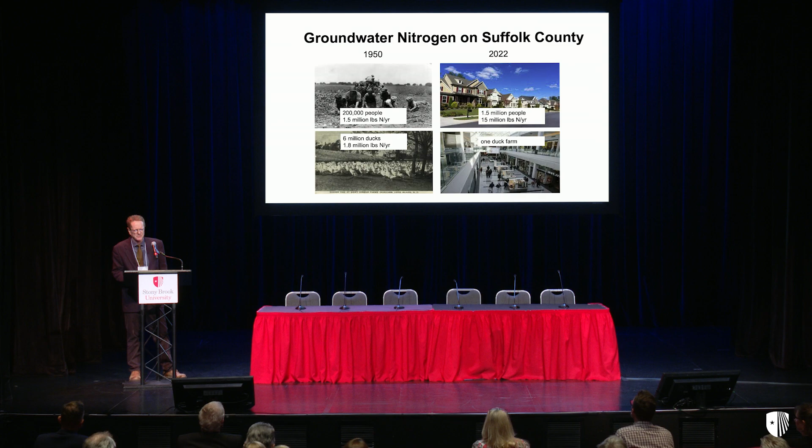This morning, I'd like to give you an update on our non-proprietary technologies for removal of nitrogen from on-site residential wastewater. You'll see some overlap, and so I will be brief in some of my opening comments, but things have changed a lot in the last 75 years on Long Island. The human population has increased by 7 times. The duck population has virtually collapsed, but we've transitioned from an agricultural economy to a more suburban economy.

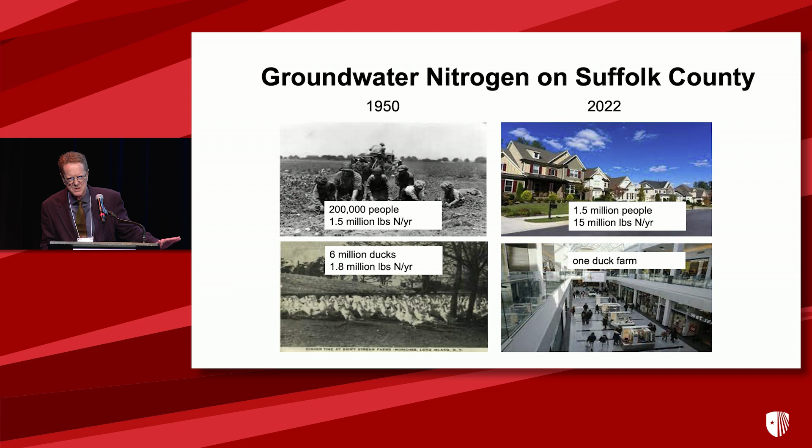Humans, ducks, or human waste, duck waste, and fertilizers from agriculture all create excess nitrogen in their environments, but the net on Long Island in the last 75 years has been an increase of nitrogen loading to our groundwater, which, as Chris describes, cycles through our aquifers 5 times.

Unlike in Nassau, where most of the communities were planned and most were sewered, in Suffolk County, we grew without sewers, first with cesspools, and later from the 70s with septic tanks and leaching rings. So there's roughly 360,000 residences in Suffolk County that have these technologies that don't remove nutrients, either phosphorus or nitrogen.

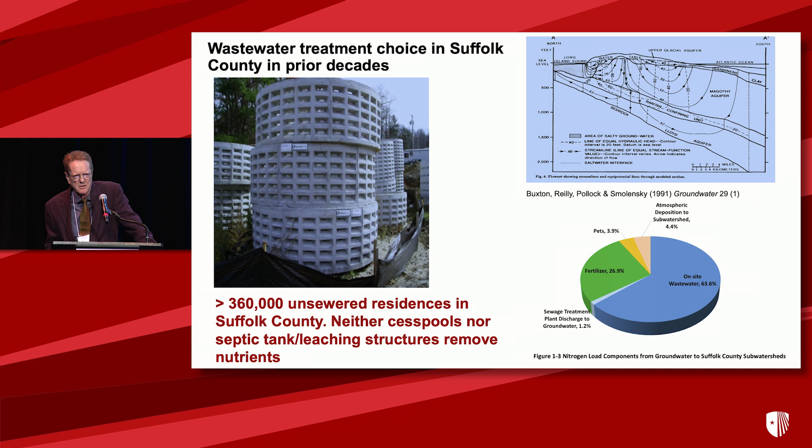And Chris explained the water cycling already, from the drinking water estuaries to our marine environment. About 2/3 of the nitrogen entering those environments is from septic residential wastewater. That not only affects our estuaries, but also our drinking water wells, and our wells, before they're mixed, have some of the highest

More recently, there's been a lot of epidemiological work which indicates correlations between lifetime exposures to nitrate and various cancers. And these epidemiological studies have been done by the Iowa Women's Health Study, and also in Europe, where they keep track of this kind of information. And those correlations exist at 3 milligrams per liter.

But I want to emphasize that this is lifetime exposure. So I'm not suggesting that we shouldn't drink the water out in restaurants in Greenport, not like that. But we also shouldn't ignore it.

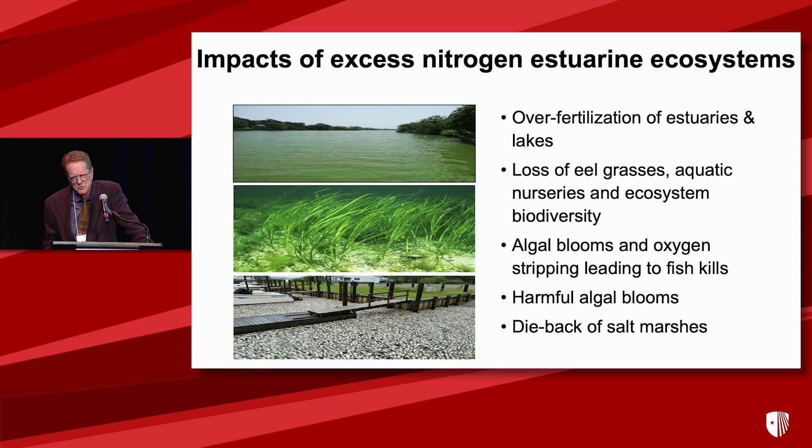We also, on Long Island, have excess fertilization creating taller plants in salt marshes, and then when they die and they fall over because they're larger than the natural salt marshes, you create dieback of those salt marshes, which we found out what the consequences of that was in Sandy.

The really positive news here is that Suffolk County has responded to this situation in a very responsible and comprehensive way with the subwatersheds wastewater plan, which Peter Scully, one of our guests here, was instrumental in pulling together. And the accompanying legislation, the Article 19 legislation, has now produced 7 systems which are available for commercial use, which lower very, very high nitrate levels in wastewater in Suffolk County down to below 19 milligrams per liter.

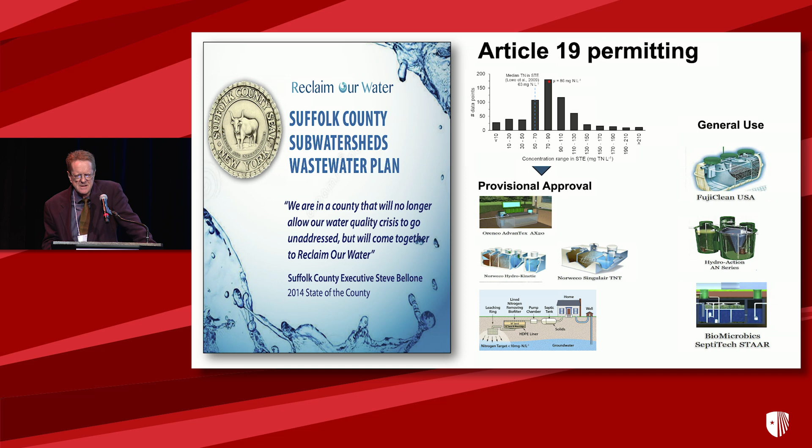The chart in the upper middle here shows that we have over 20 milligrams per liter higher nitrate than the national averages here. So these take wastewater from about mid-80s nitrate levels down to under 19, which is a major accomplishment that Suffolk County should be really proud of.

So now, having gone through the background, I'd like to just talk about some of the center's technologies. They all share and work on a common principle, which is biological nitrification, denitrification. And they do that through filtering wastewater through a sand bed, which nitrifies, and then through a sand and wood chip layer for denitrification. All of those systems operate with a septic tank, a pump chamber, but then the biofilter itself, we have different configurations which control the hydraulics.

So one of them, the most basic one, is an unlined NRB, nitrogen removing biofilter. And the effluent from that system goes directly to the environment, directly to groundwater. You don't need to invest money in leaching galleys or leaching rings with this system.

On the other hand, what we've found is that with the periodic intermittent flows of wastewater as it's dosed to the system, denitrification is less efficient, and there may be preferential flows that develop. That system, we now have a revision of with design modifications, which I'll talk about briefly momentarily.

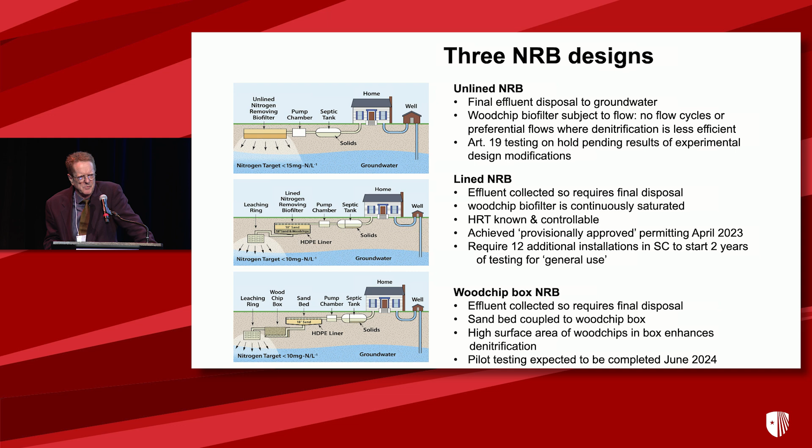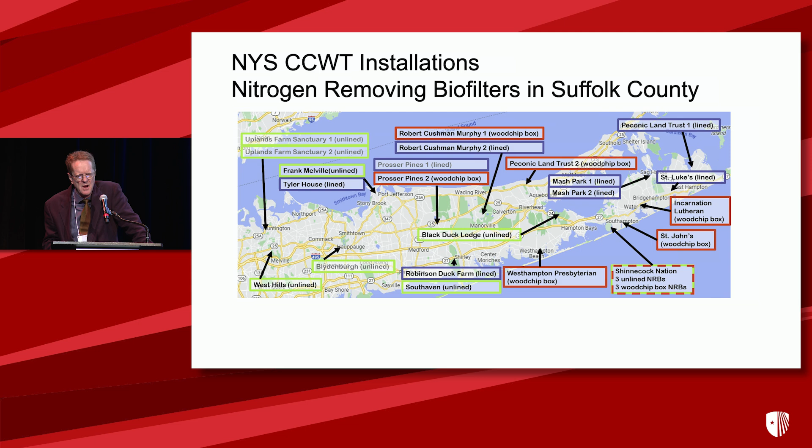It achieved provisional permitting last year, and we're in the process of organizing financing for another 12 installations so that we can start general use in the near term. Similar situation with our wood chip biofilter, and we're expecting to finish pilot testing for provisional use this month. And we have over 20 of these systems in Suffolk County now, with additional systems that we've installed in collaboration with Indian Health Services at the Shinnecock Nation.

The performance has been pretty good. Our lined nitrogen NRBs are getting about 13 milligrams on average in final effluent. That's about an 83% reduction. Our wood chip boxes, and these are numbers we've calculated recently going through April, are even lower, down to about 7 milligrams per liter, or over 90% removal. The unlined are up in the mid-20s with about a 2/3 removal, which is why we need to work on them a little more.

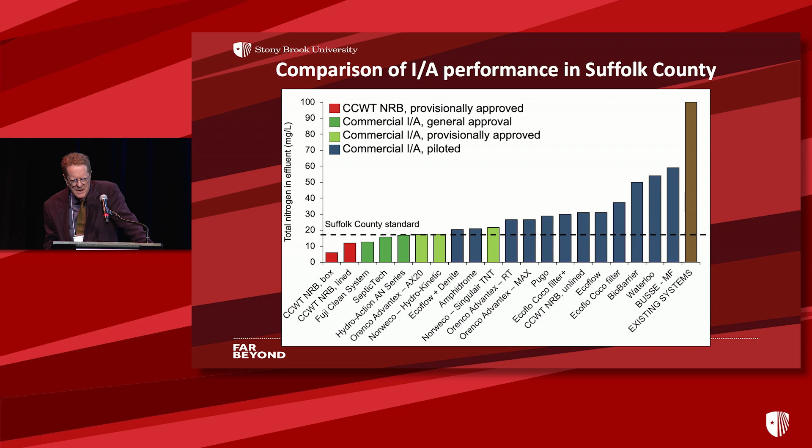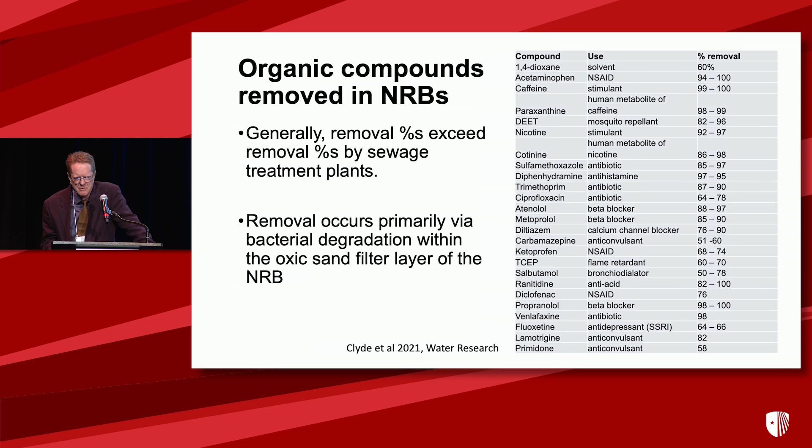And as Chris mentioned, they don't just remove nitrogen. A student here, Tricia Clyde, did a lot of work getting her PhD on studying how they remove organic contaminants that are in pharmaceuticals, that are in personal care products. And what she found was that removals in the NRB actually exceeded removals in municipal treatment plants. And, very importantly, that removal occurs via biological transformation. It's not just adsorbed to the sand beds in the NRBs.

We often get the question, well, great, but how long are these systems going to last? Don't the wood chips run out of carbon? So we installed a lined system and a wood chip box NRB up at the Massachusetts Alternative Septic System Testing Center when the center first started out in 2016. So it's coming on 8 years. The blue line here is the influent levels at MASSTC, and the orange line is the total nitrogen in effluent. It increased for a while, but it was increasing because we were ramping up the loading rates in an experiment to see how far we could ramp them up before the removal deteriorated. And so we kind of found that out and decided to stop doing that. And since then, they've stabilized and come down. And so this is 8 years.

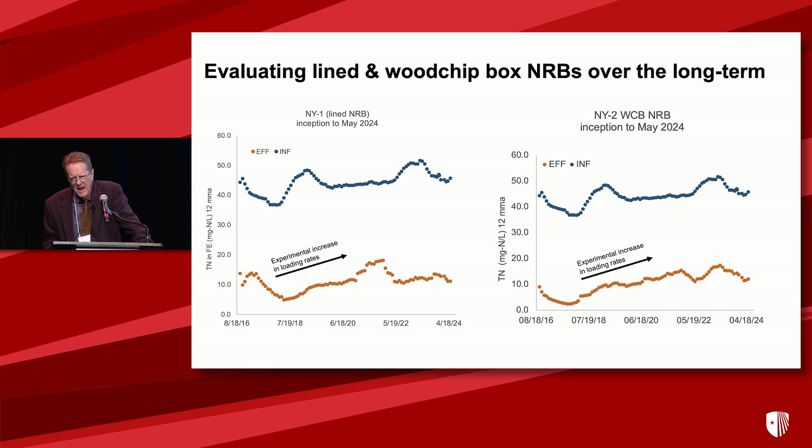Folks up at the University of Waterloo put some similar systems in ground in the mid-90s. They published an article after 15 years, which showed they were still working, and anecdotal evidence suggests that they're still working. So decades is the answer to that. As long as you keep them anoxic, that's the really important thing. Wood chips last, and they work with what's called BOD from the wastewater itself in combination to supply carbon for denitrification. So we want to try a few new ideas, not just continue to test our old ideas.

So all of the Article 19 approved systems in Suffolk County right now rely on pumps. They rely on electricity. And that's not a bad thing. Those pumps work very well. But can we do it without incurring electricity charges for homeowners on Long Island? Not in most of the commercial systems, because they're what's called plug-and-play systems. You dig a hole, drop in a box, connect it to the house and to the final disposal, and you're done. But our systems all work, as I said, with a septic tank and a drain field. So can you put in between those a gravity device?

That gravity device is called a SeptiSurge. The way it works is upstream of that gravity device, you have columns which store your septic tank effluent. When the water pressure in those pipes reaches a certain level, it triggers a mechanism in the septic tank, and all that water flushes at once. You need that big flush. We're talking about 25 gallons or so to fill up all the effluent lines in that drain field. The reason is you want to spread that evenly over the entire drain field. You don't want it preferentially flowing.

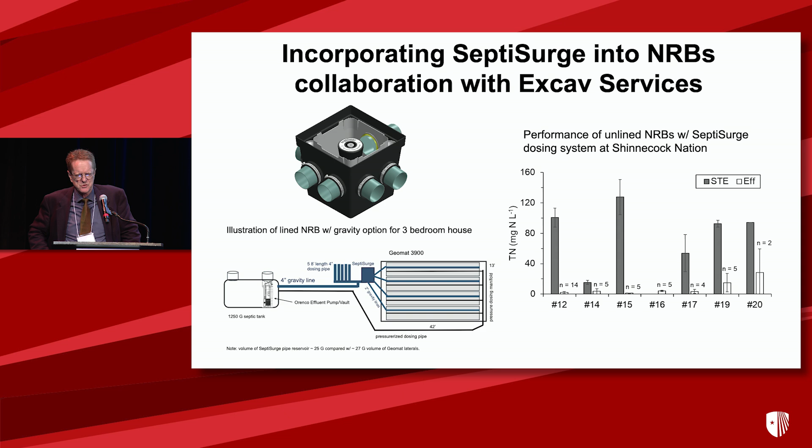And I mentioned earlier that our unlined systems haven't performed as well as our lined or wood chip box systems because of the lack of saturation of the biofilter. So what can you do about that? So we're working, again, with the system up at MASSTC to slow the wastewater percolation through the system down, to increase the residence time, to increase the amount of time for treatment, for denitrification.

And the way that we do that is we're interspersing every 6 inches underneath the sand layer, 6 inches of sand and wood chips for denitrification, then 2 inches of pea stone, 3/8 pea stone, and we're repeating that process. The idea is that the discontinuity there between the sand and the pea stone creates a capillary rise in the sand, slowing the residence time. The pea stone also is more permeable than the sand, so it will flow laterally to increase the evenness.

How are the results of that experiment done? Well, we've been running it since last summer. And initially, I should say the control here is an unlined NRB versus the multi-layer system. So we're running it at MASSTC type wastewater levels, which is about 45 milligrams per liter of nitrogen in the wastewater, and we weren't seeing much of a difference. So in March, we virtually doubled that number to Suffolk County-like nitrogen levels at over 80 milligrams per liter.

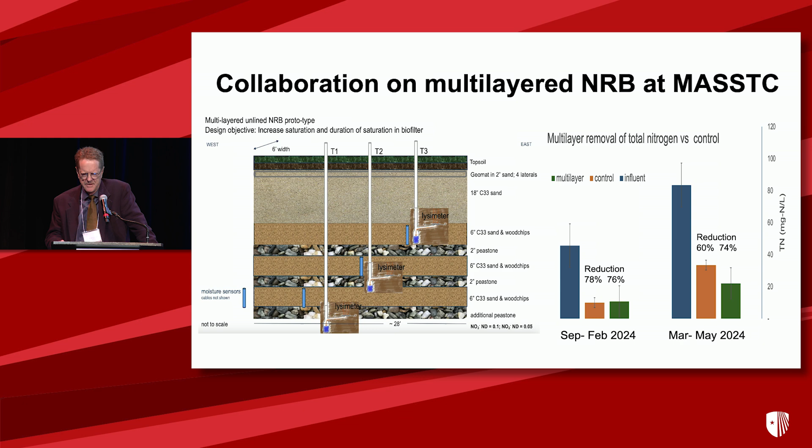Wood chip biofilters can also be used as polishing steps and to further clean IA systems. So back in 2020 in East Hampton, we installed 2 systems which attached a wood chip box to an IA system. And in one case, the IA system was working very well, and we were able to remove nitrate further, polishing it. We got about a 40% reduction. In a second instance, the IA system wasn't working well, but the biofilter functioned as a fail-safe mechanism, and we got pretty much just about the same final nitrate in solution.

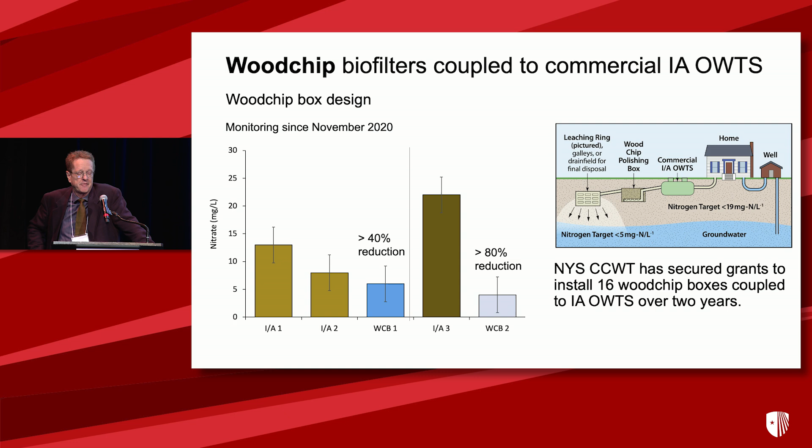I should say the center has grants to install 16 of those because, of course, n equals 2 is not a sufficient data set to prove the concept. So we intend to have more data in the coming years on this approach.

There's a lot of what are called pressurized shallow drain fields that get installed in areas with shallow water table on Long Island, and that's as a final disposal polishing step. In order to put those in, in 3 out of 4 times, they actually have to remove the indigenous natural fill that's there and put in new fill.

Well, the question is, if you're doing that, can't you mix wood chips in with it, since you've already had to excavate and had to bring in new material? Just bring in some more wood chips. And so that could be a very inexpensive way to go, and that's very important here. So in collaboration with Suffolk County Department of Health Services, and we're very grateful, they have a grant to do about 20 of these projects, and we're going to test different design ideas for the PSDs with wood chips.

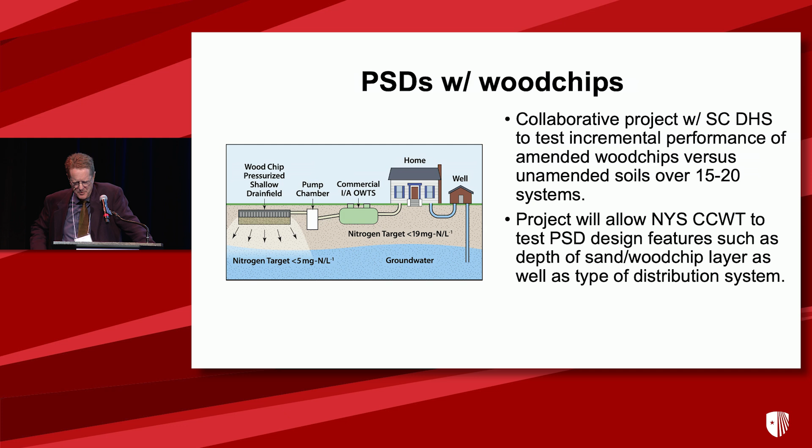What wood chips work best? It's kind of an obvious question, and we needed to answer that since we're putting in a lot of wood chip biofilters. And so we designed an experiment about 2 years ago with influent nitrate at different levels. And the answer, in short, seems to be that oak, which is pretty available on Long Island, works better than the others. We tested cherry, oak, pine, and upstate hardwoods. That's a commercial brand. But that experiment continues to see if the conclusion changes over time.

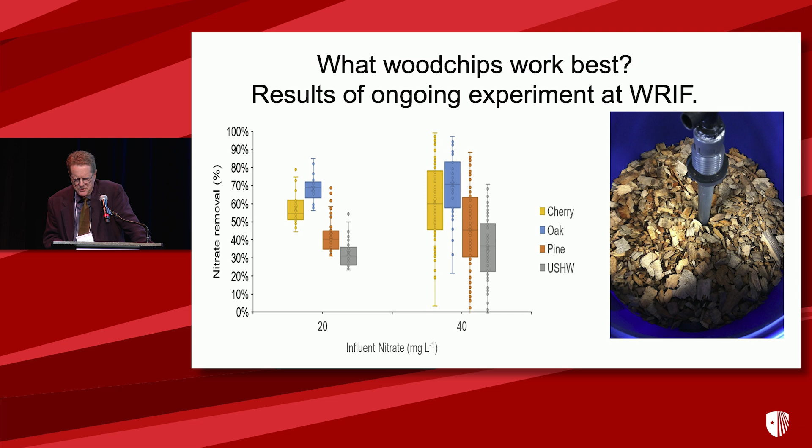There are over 100,000 septic tanks with leaching rings in Suffolk County. This is from the subwatersheds plan. So some of the systems that I've discussed address those sites. We have the wood chip biofilters as polishing units for the IAs, we have lined wood chips and some other systems, NRBs, to replace cesspools. But we've got over 100,000 septic tanks and leaching rings.

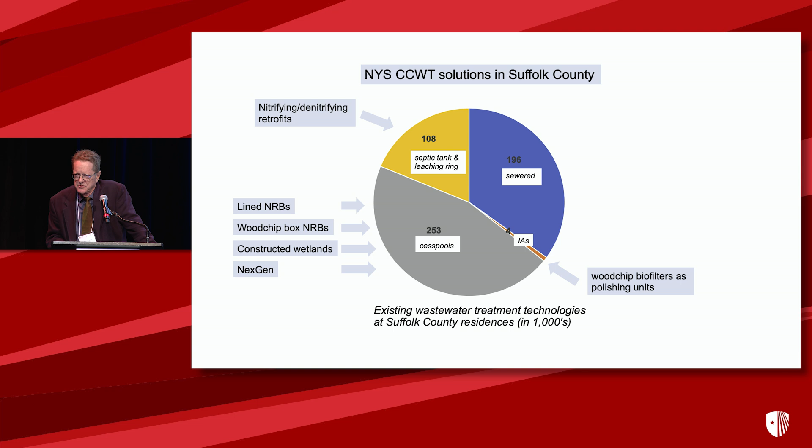Can't we use that infrastructure to remove nitrogen? Is it cost effective to do it that way, rather than bring in a whole new system that we might have imported from Japan or somewhere? And so this experiment that we put together attempts to answer that question. So it, again, revolves around nitrification, denitrification.

And one of the big questions was, are those leaching rings big enough to include a wood chip biofilter? And we talked to various people in the industry, and the configurations of these installed leaching rings are, of course, different in different cases. But in just about all the cases, the numbers that we ran showed that we can put a biofilter in and have plenty of space for leaching, plenty of volume.

The bigger question for us is, can we nitrify in that septic tank? And so that would be through aeration. And basically, we do what you do in a fish tank. You create a circular flow. And you see that in the blue, there's the column there. That's filled with little chips, which nitrifying bacteria use as a substrate. The air creates a water flow that cycles water through the column.

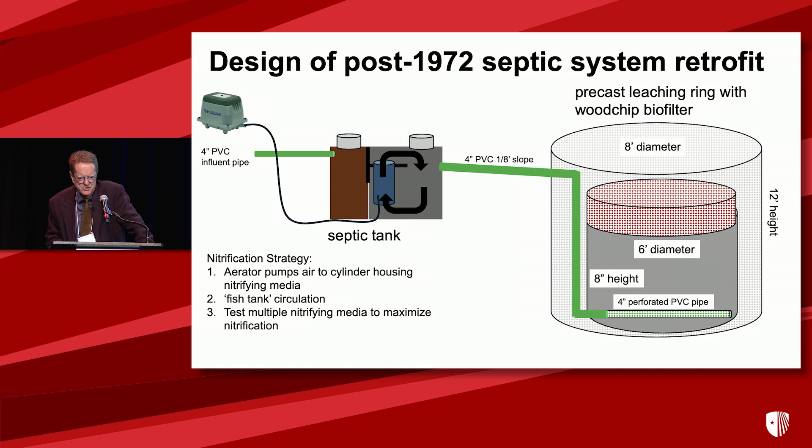And so we did that at our wastewater research and infrastructure facility up near the university. And that's on the left there in the green column. That's a column. It's on a rail, so we can easily change out those media where the nitrate producing bacteria grow. And then there's a septic tank, and it goes to the wood chip box.

We started it in the winter so we could work out the hydraulic bugs in the system. When the weather warmed up in May, it started to nitrify. We may need to change out those filters. That's the purpose of the experiment, find the optimal filter.

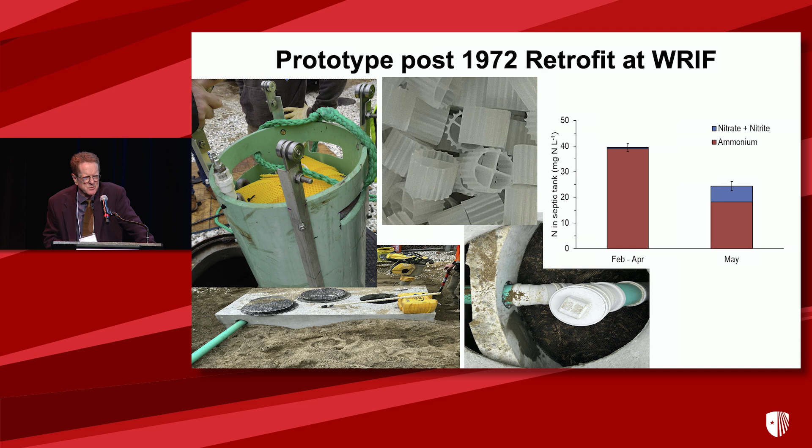Lee already did a great job justifying reuse and recovery of nutrients. Our solution here is a really Long Island specific situation. But the way that works is you collect urine in a no-flow toilet or urinal, and then you need to pasteurize it to disinfect it, and our center has one of those, and then you apply it and you don't need to apply it on food. You don't need to have to go through the FDA.

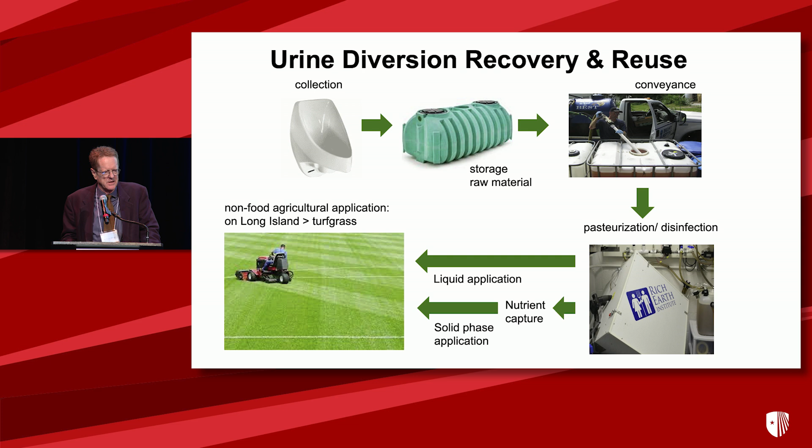If you use these dry toilets, well, then you don't have to use valuable clean water from our aquifers. And as Lee already pointed out very sufficiently, these are valuable chemicals. But the real savings for our county is that you don't import nitrogen or phosphorus in synthetic fertilizers. You don't have to pay money to bring it into the county. You keep the nutrients within the county.

New York State Department of Agriculture in 2009 came up with an estimate, and it's almost 4,000 tons of nitrogen a year that we import into the county. If we assume that we converted all those 360,000 houses to IA systems, the amount of nitrogen that you're going to save, whatever that estimate is, this importation of synthetic fertilizers is on the same order of magnitude. Depending on your numbers, it's a third or a half of what you would save. So it's very important to address this through nutrient recycling.

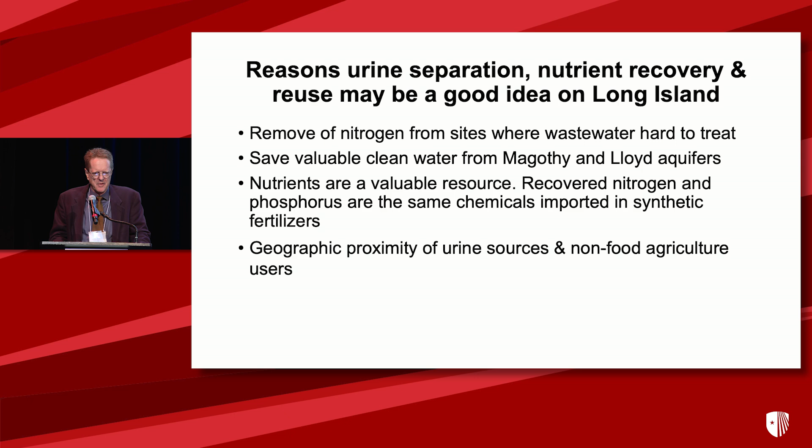In a lot of areas of the US, they can't do this because there's a long way, transportation-wise, between your urine source and your use. Not here in Suffolk County. And in Suffolk County, there's a lot of public restrooms which can be used as sources of these nutrients. And in fact, some of the New York State public parks at beaches are under court order to collect urine and have installed these urinals. But hauling that to a wastewater treatment plant is a waste, and it doesn't stop the importation of the nutrients in synthetic fertilizer.

On the demand side, there's a lot of good news here because, one, we're a major producer of turf grass. Two, we've got over 100 golf courses on Long Island. And three, despite efforts of some to encourage natural lawns, people on Long Island still like their fertilized lawns. So the question is, can we produce a good fertilizer? And I was really impressed with Lee's numbers. And we're in the process of using different materials, more with an emphasis on both nitrogen and phosphorus.

Right now, we're testing just straight aqueous application to see what those numbers look like in terms of the biomass of the turf grass that's produced, and in terms of how much nitrogen or phosphorus leach out into the groundwater.

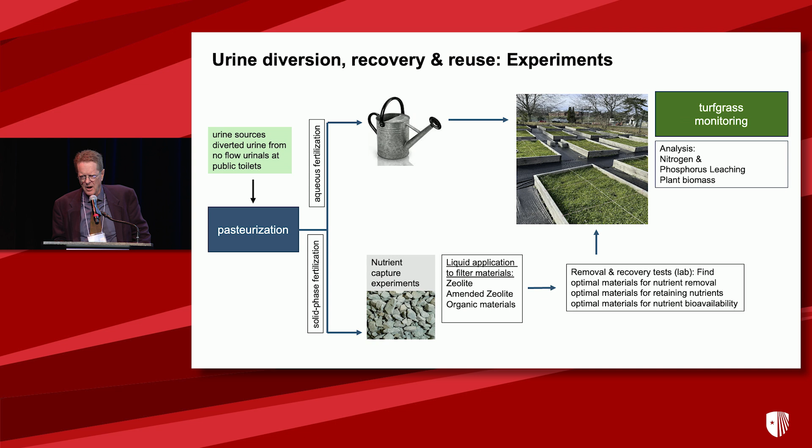But because direct fertilization isn't for everybody, we're trying to capture that on materials, particularly zeolite right now, and organic materials. The idea is to find the best material for removal, the best material for retaining the nutrients, and the best material for bioavailability. So those are all things we're investigating. We have a poster. I'm not going to go into the details now.

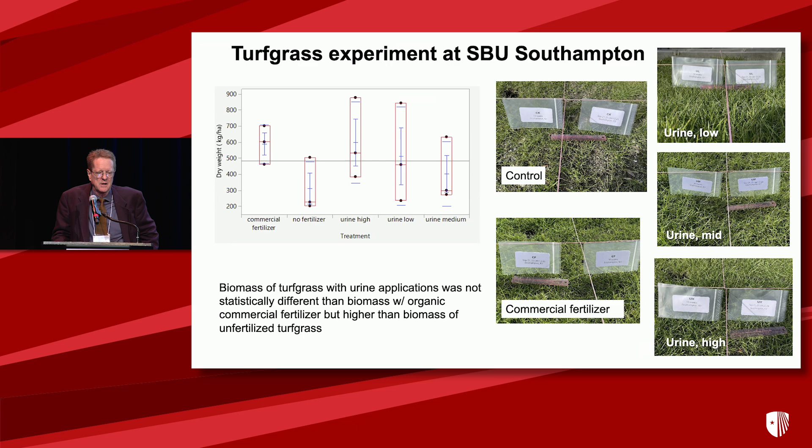This is just one experiment that shows the aqueous application. Turns out, and we're still running this experiment, but on some initial observations, the urine does as well as the commercial fertilizers, and both of them do a lot better than no fertilization.